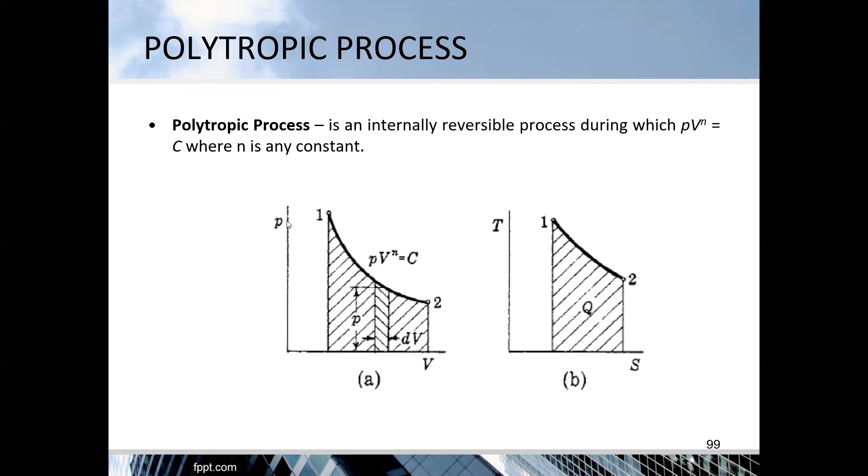So PV exponent n as constant. PV is equal to MRT. And T2 over T1 is equal to V1 over V2 exponent n minus 1, or T2 over T1 is equal to P2 over P1 exponent n minus 1 over n.

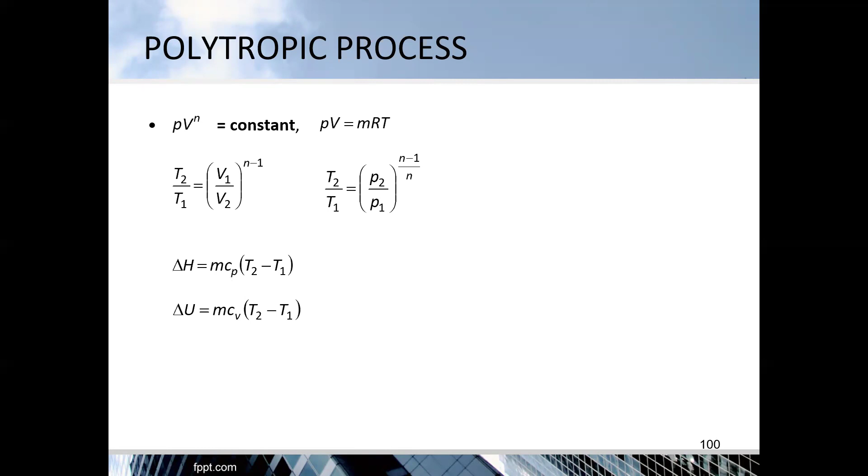Delta H is almost also the same. MCP times T2 minus T1. Delta U is equal to MCV T2 minus T1. All the equations, we will just put here.

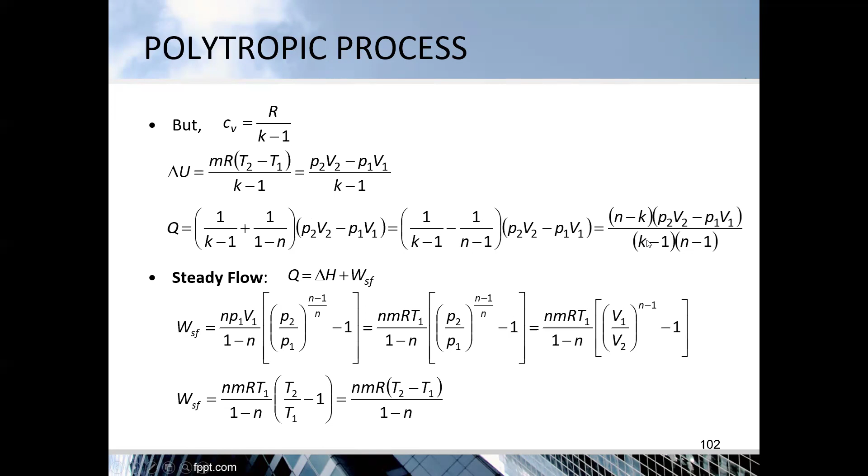For steady flow work, Q is equal to delta H plus WSF. WSF is equal to N times P1V1 over 1 minus N times P2 over P1 exponent N minus 1 over N minus 1.

Then equals NMRT1 times P2 over P1 exponent N minus 1 over N minus 1, which is equal to NMRT1 over 1 minus N times V1 over V2 exponent N minus 1 minus 1, or NMRT1 over 1 minus N times T2 over T1 minus 1, which is equal to NMR times T2 minus T1 over 1 minus N.

But CP is equal to KR over K minus 1. So delta H is equal to MCP times T2 minus T1, which is equal to K MR times T2 minus T1 over K minus 1, equals K times P2V2 minus P1V1 over K minus 1.

So adding, Q is equal to delta H plus steady flow work. This becomes 1 over K minus 1 plus 1 over 1 minus N times P2V2 minus P1V1, which is equal to K over K minus 1 minus N over N minus 1 times P2V2 minus P1V1.

So there's something here. Q is equal to N minus K times P2V2 minus P1V1 over K minus 1 then N minus 1. See? K here, K. Wait.

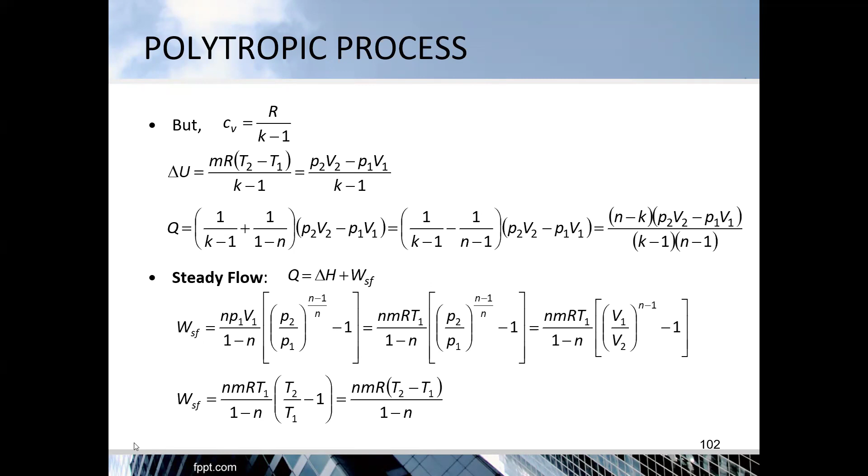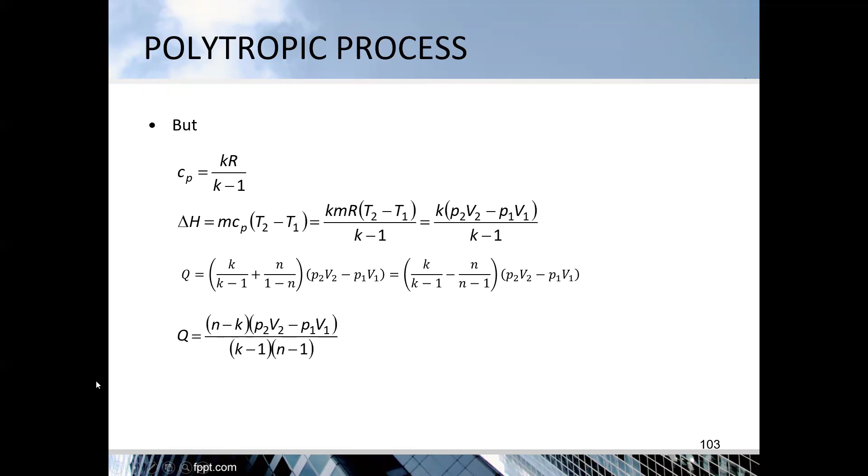So, Q is equal to K over K minus 1 plus N over 1 minus N. Yeah, it's the same. So here it's plus and minus. So this reverses.

Entropy, delta S is equal to mCV times N minus 1, N minus K over N minus 1 times ln of T2 over T1. Or delta S equal to mCV times N minus K times ln of V1 over V2.

Okay, so delta S equal to mCV times N minus K over N minus 1 of ln of P2 over P1 exponent N minus 1 over N. So mCV times N minus K over N ln of P2 over P1.

So please just check it. So CV times N minus K over N minus 1 is equal to Cn. So specific heat at polytropic. So just use that here for entropy.

Note, steady flow work is WSF plus delta K plus delta P is equal to negative integral of V dP.

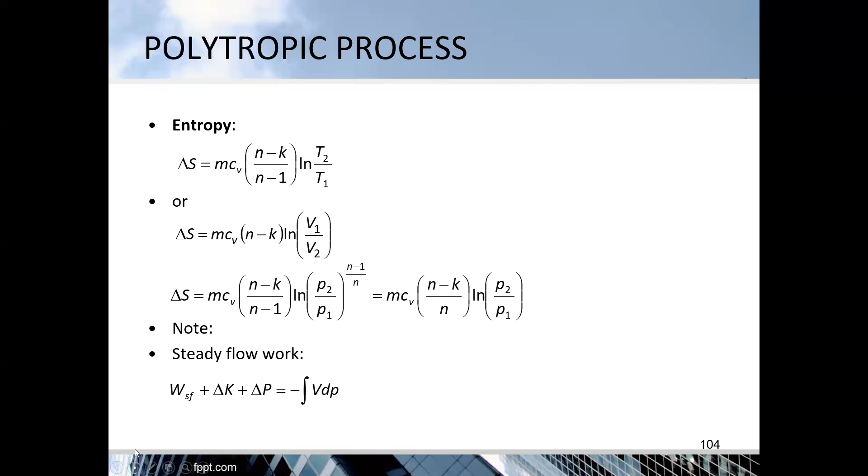Now, curves for different values of n. So here you can visualize it, because you need this. So the PV diagram, this is it. The vertical is isentropic, isochoric with n infinity, not 8.

Horizontal is pressure constant, n is equal to 0. So here is 1. And n is equal to 1.

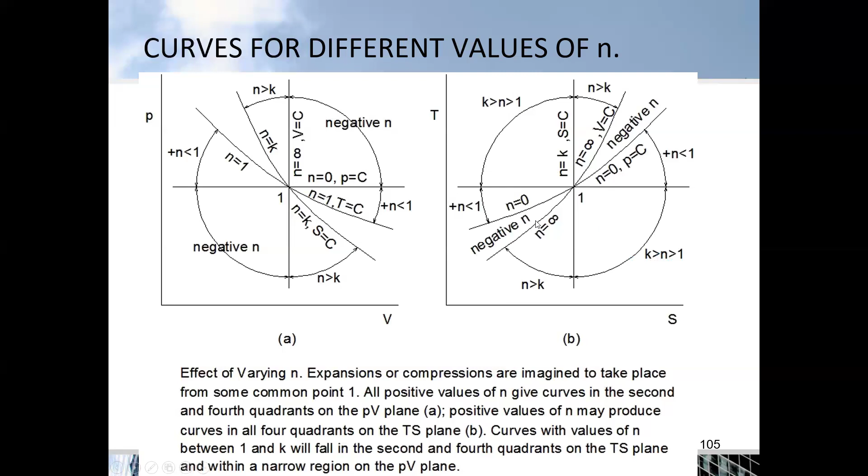Kasi yan. So example 36. After a series of state changes, the pressure and volume of 2.268 kg of nitrogen are each doubled. What is delta S? The given CV is 0.7442 kJ per kilogram Kelvin, CP is 1.0414 kJ per kilogram Kelvin. Solution: the formula is delta S equals mCV ln(T2/T1) plus MR ln(V2/V1). So yan ang general equation ng entropy.

And then substitute mo yung kasi ang given mo is pressure and volume. So delta S is equal to mCP ln(V2/V1) plus mCV ln(P2/P1). Derive yun na lang yan. Okay.

So delta S is equal to 2.268 times 1.0414 times ln(2V1/V1) plus 0.7442 ln(2P1/P1). It's double, di ba? So it's equal to 2.807 kilojoule per Kelvin.

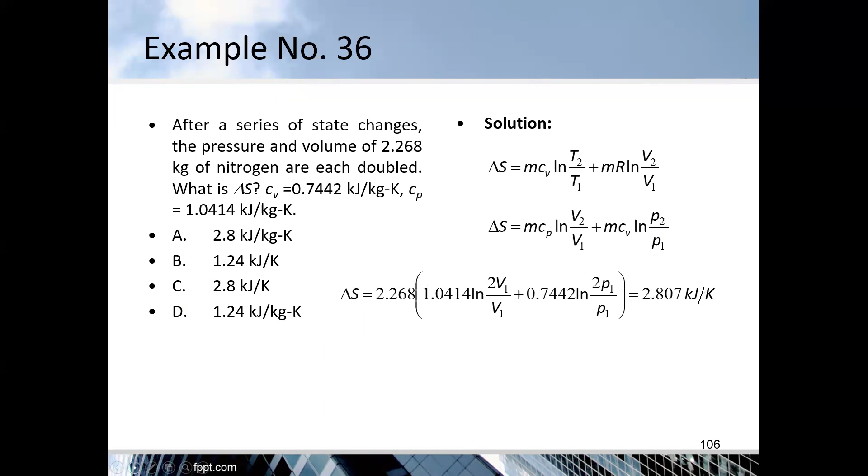Stagnation properties. Stagnation properties are those thermodynamic properties that a moving stream of compressible fluid would have if it were brought to rest isentropically. So no outside work, the kinetic energy brings about the compression.

The stagnation enthalpy H0 is equal to H plus V squared over 2GcJ. The stagnation temperature T sub 0 is equal to T plus V squared over 2GcJCp. And T sub 0 over T is equal to P sub 0 over P exponent (K minus 1 over K), is equal to 1 plus V squared over 2GcJCpT. Okay? So H0 mo dito galing, T sub 0 is equal to sa galing, then P sub 0 dito galing siya.

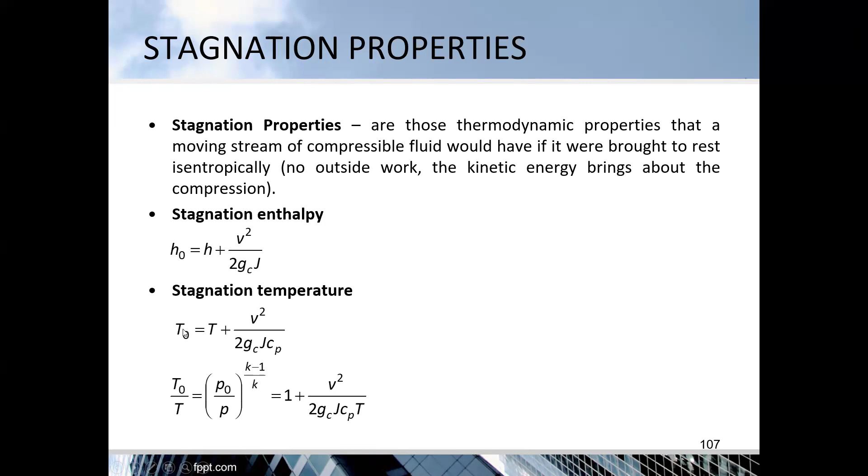Solve for T sub 0 muna. So makuha mo yung stagnation properties.

Mach number. Mach number is the ratio of the actual speed divided by the local speed of sound A in the fluid. So M is equal to V over A. For M less than 1, tawag doon is subsonic. M greater than 1 is supersonic. Sonic is 1. So acoustic speed A is equal to GcKRT exponent 1 half, yung speed of sound.

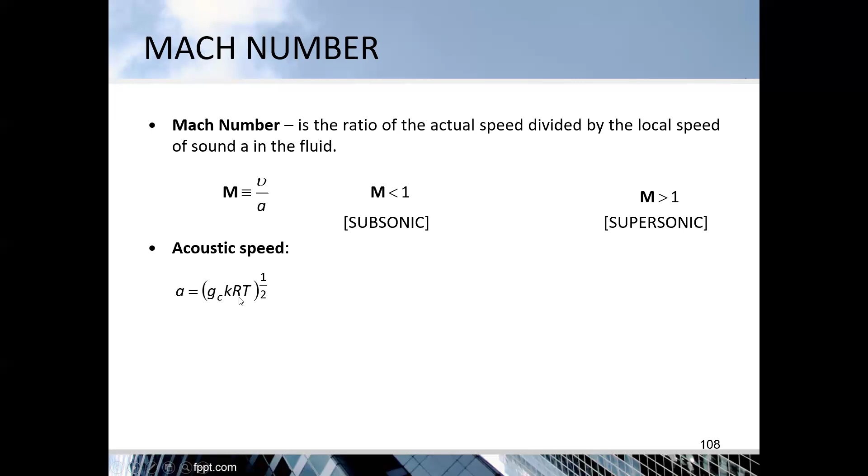Mollier diagram. This is the chart on which enthalpy is the ordinate and entropy is the abscissa. Straight line na straight line. Huwag yung i-drawing ulit yung form.

So dito kayo magpa-plot, entropy and enthalpy. Ito pala enthalpy. Tama, ito yung enthalpy niya. Dito siya, yung ano, vertical na yan: 2,000, 2,500, 3,000, 3,500, 4,000.

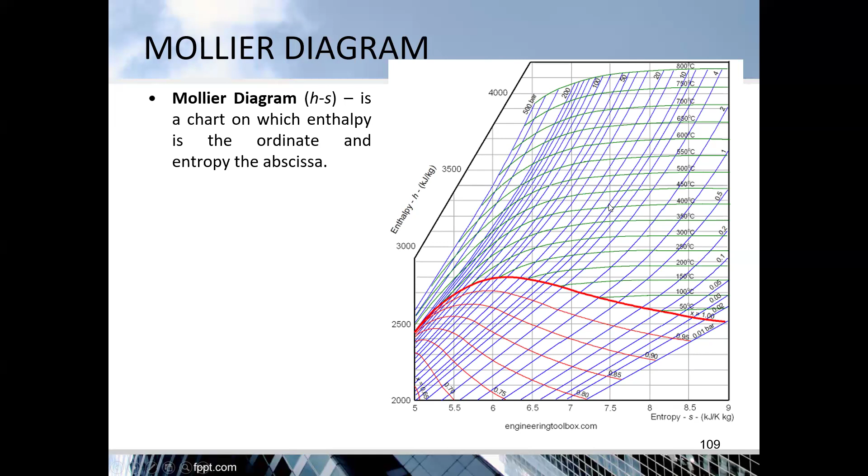So ang bawat 400 C, itong green, and pressure na 10, at least 10 bar, ito, dito. So makuha mo yung entropy, kung pababa, punta doon, so makuha mo yung properties, enthalpy and entropy.

Kailangan yun. So temperature entropy diagram, common din to sa steam, diba yung mga Rankine cycles. So yan, is this a constant temperature and pressure? Tapos dito na, pressure na lang ang constant mo. So superheated na siya, dito naman, part na to is liquid region.

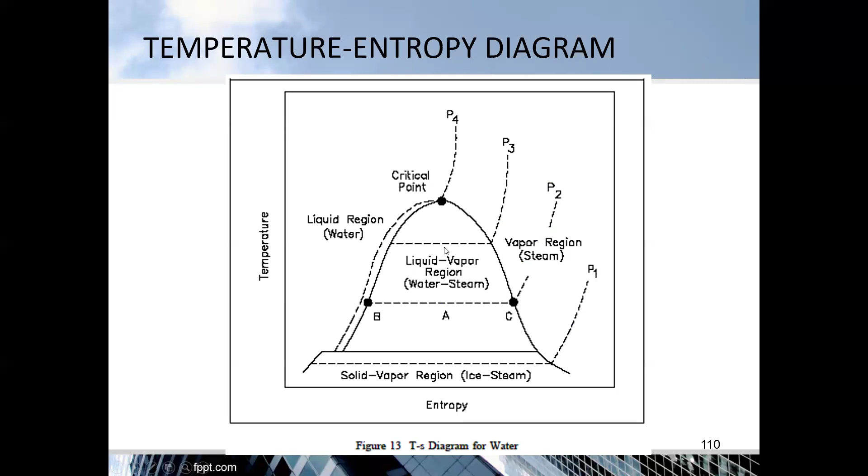Pag sinabing subcooled, that is the temperature ang na-extend. Pag sinabing compressed, pababa siya, tumataas yung pressure, pababa. Ang tawag talaga, yung from compressed liquid, yan. Dalawa yun, subcooled and compressed.

PH chart sa mga refrigerant, enthalpy and pressure, yung saturation curve. So andyan, makikita mo na ibang properties dyan.

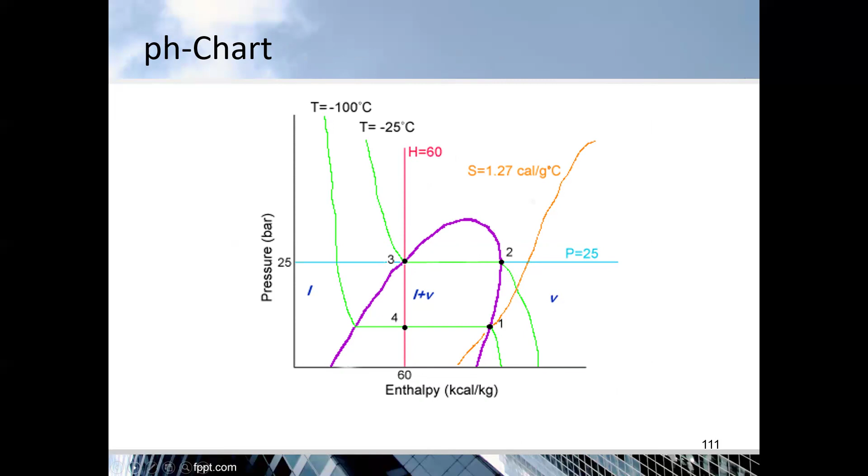Mixture. So mixture tayo, pure substance. Mixture, a substance made up of liquid and vapor portion, or two-phase liquid vapor system. X is the quality or dryness factor or vapor content. Y is the 1 minus X, is the moisture content or the wetness factor.

Properties of mixture: V is equal to V sub F plus X times V sub Fg. U is equal to U sub F plus X times U sub Fg. S is equal to S sub F plus X times S sub Fg. So ito yung mga properties na pwede mo gawa ng ganyan, kasi lahat siya unit mass.

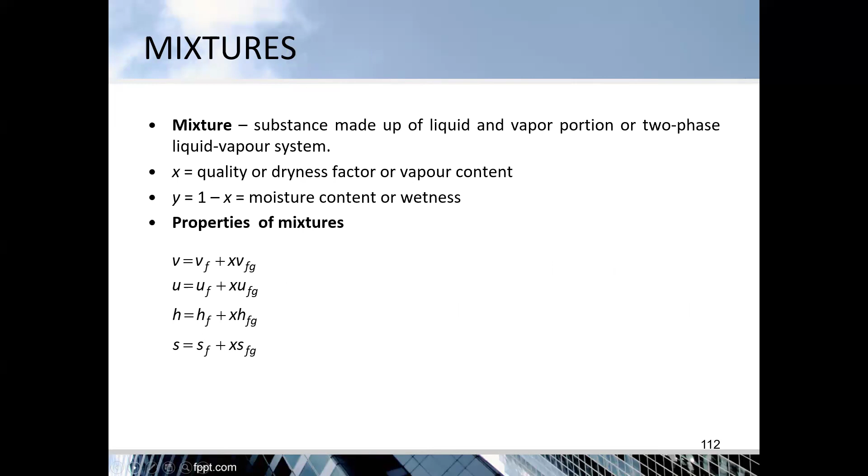So, this is about properties at saturated liquid. This is the difference between saturated vapor and saturated liquid. So, example number 37.

After expanding 2.5 liters of superheated steam at 2.5 megapascal absolute and 400 C, its pressure was decreased to 0.01 megapascal absolute. If its dryness fraction is 90%, what is the final volume of the steam in liters?

This is from the board exam, it appears sometimes. At 2.5 megapascal absolute and 400 C, V is equal to 125.2 times 10 exponent negative 3 cubic meter per kilogram. At 0.01 megapascal absolute, V sub F is equal to 1.0102 cubic meter times 10 exponent negative 3 cubic meter per kilogram, and V sub G is equal to 14,674 times 10 exponent negative 3 cubic meter per kilogram.

Solution: V sub 2 is equal to V sub F plus X times V sub G minus V sub F. Let's get the specific volume of the steam. After expanding, you don't consider the expanding in the superheating anymore. You go straight to 0.01 megapascal pressure and the quality or dryness fraction of 90%.

So V sub 2 is equal to 1.01022 times 10 negative 3 plus 0.9 times 14,674 times 10 negative 3 minus 1.01022 times 10 negative 3. Let's add this up.

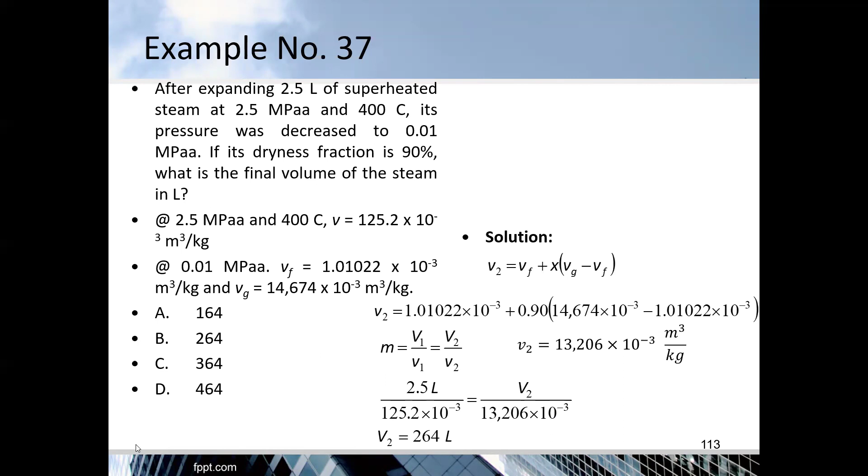Example number 38. Determine the heat transferred to the cooling fluid in a condenser operating under steady flow conditions with steam entering with an enthalpy of 2,300 kJ per kilogram and a velocity of 350 meters per second.

So kinetic energy is not zero. The condensate leaves with an enthalpy of 160 kJ per kilogram and velocity of 70 meters per second. Using change in energy in and out, consider Q as the input first. So Q is equal to H2 minus H1 plus V sub 2 squared minus V sub 1 squared over 2, divided by 1,000.

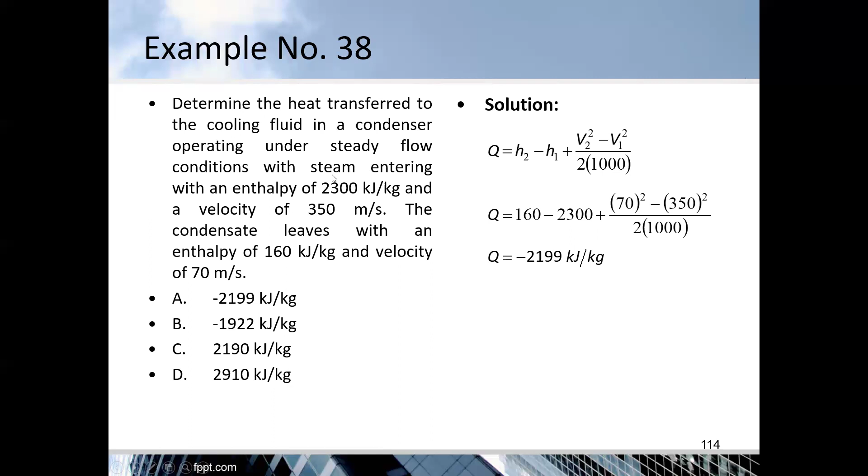1,000 is the conversion factor because what you get there is Newton meter, kilogram, or joule. So divide by 1,000 to get kilojoule. Substitute values: 160 minus 2,300 plus 70 squared minus 350 squared divided by 2 divided by 1,000 is negative 2,199 kilojoule per kilogram. We're using per kilogram because we have no given mass, and the answer is also per kilogram.

So the Carnot cycle. Carnot cycle: T1 minus T2, is equal to T4 minus T3.

Work is equal to QA minus QR, is equal to T1 times S1 minus S4 minus T2 times S1 minus S4. So efficiency E is equal to work over QA, is equal to QA minus QR over QA. Substitute: T1 times S1 minus S4 minus T2 times S1 minus S4 over T1 times S1 minus S4 QA. So E is equal to T1 minus T2 over T1, is equal to TH minus TL over TH.

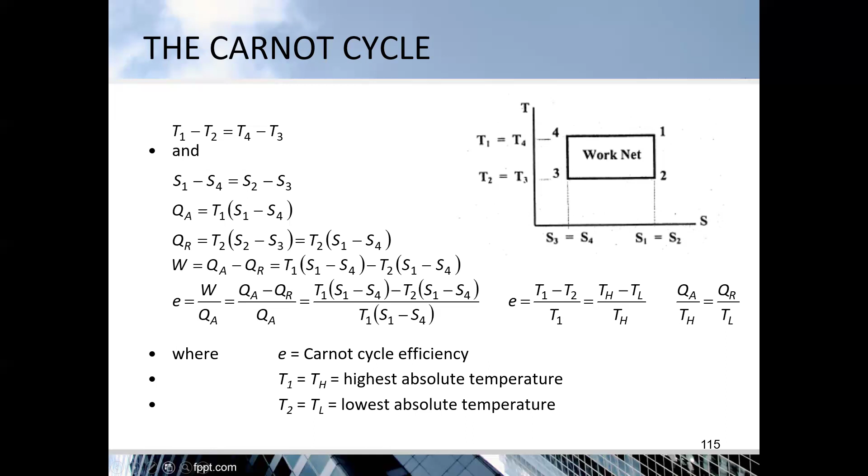Next is example 39. A Carnot engine receives 130 BTU of heat from a hot reservoir at 700 Fahrenheit and rejects 49 BTU of heat. Calculate the temperature of the cold reservoir.

So TH is equal to 700 plus 460, or 1160 Rankine. So efficiency is work over QA, is equal to QA minus QR over QA, is equal to TH minus TL over TH. What we need is temperature. So use temperature: 130 minus 49 divided by 130 is equal to 1160 minus TL over 1160. So TL is equal to 437.23... Rankine, minus 460 is negative 22.77 Fahrenheit.

So letter D. There's another method for this: QA over TH is equal to QR over TL.

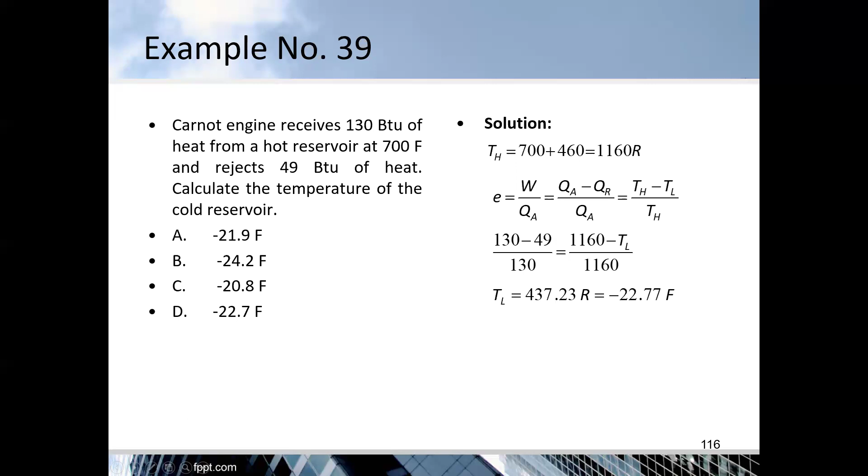Next is the Stirling and Ericsson cycle. Go back to your notes. The ideal Stirling cycle is composed of two isothermal and two isometric processes, with regeneration occurring at constant volume. The ideal Ericsson cycle consists of two isothermal and two isobaric processes, with regeneration occurring during constant pressure.

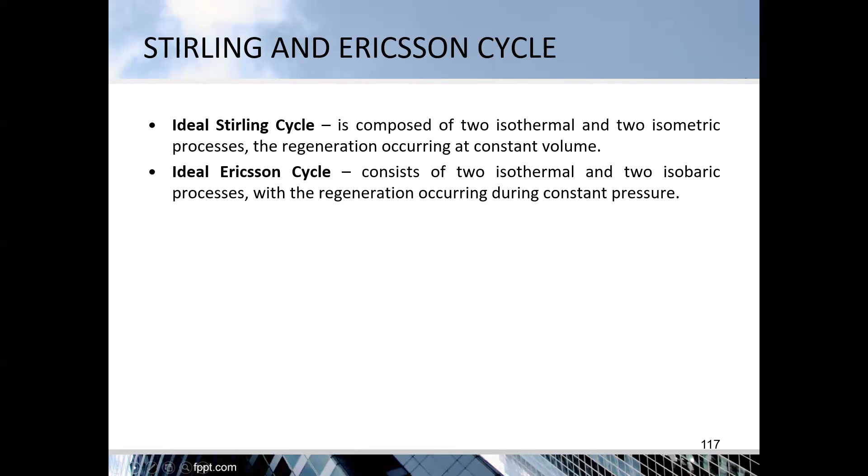So basic working cycle for various applications. For steam power plant, the common one is the Rankine cycle. Gasoline engine, spark ignition, is Otto cycle - that's not in thermo, that's for power plant. Diesel engine, combustion ignition, is diesel cycle. Gas turbine is the Brayton cycle. Refrigeration system, refrigeration cycle - there's reverse Carnot and vapor compression cycle. So there are many.

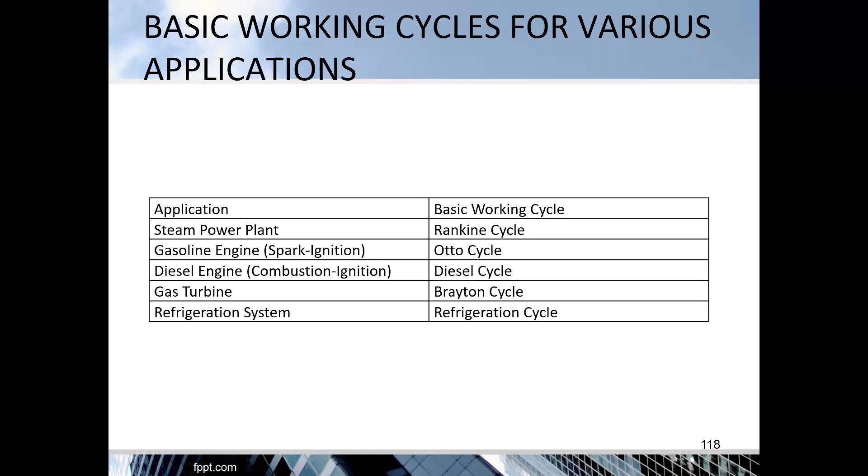Example number 40. This is a three-process cycle. 1 kilogram of air at a pressure and temperature of 1 bar and 15°C initially undergoes the following processes in a cycle. Let's start at point 1: 1 bar and 15°C. Isothermal compression to point 2 - check the curve, the curves are there.

2 to 3 is polytropic, and 3 to 1 is adiabatic. So that's the P-V diagram, the phase diagram. Double check this - the slope of PV exponent n is higher than the constant temperature line.

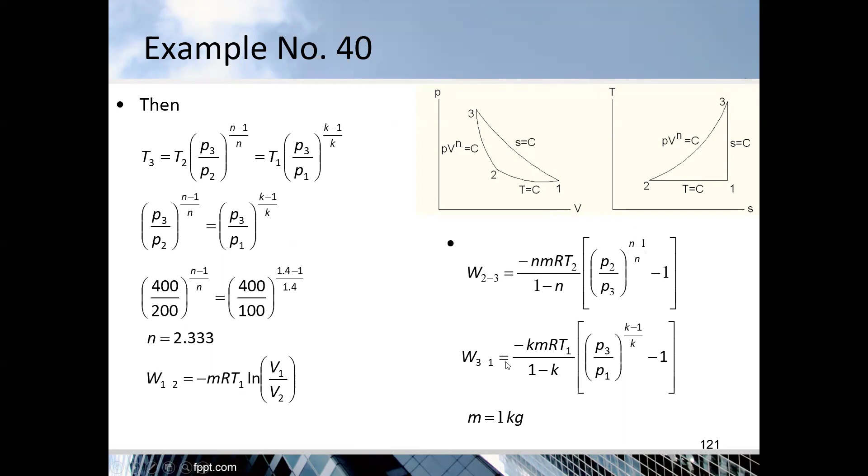From 1 to 2, this is isothermal, so negative M R T1 times ln of V1 over V2. Work for 2 to 3 is polytropic: negative N M R T2 over (1 minus N) times (P2 over P3 exponent (N minus 1 over N) minus 1). Work from 3 to 1 is negative adiabatic work: negative K M R T1 over (1 minus K) times (P3 over P1 exponent (K minus 1 over K) minus 1), where M is 1 kilogram.

Let's substitute the values. These are the formulas. So 1 to 2 is negative 1 times 0.287 - that's R for air - times 288 in SI units, 0.287 kilojoule per kilogram Kelvin, times ln of 200 over 100, based on the pressures. So this equals negative 57.3 kilojoule.

For 3 to 1, here's the equation, substitute values: negative 1.4 times 1 times 0.287 times 288, over (1 minus 1.4), times (400 over 100 exponent (1.4 minus 1 over 1.4)) minus 1 - all based on pressure. So work 3 to 1 is 140.6 kilojoule.

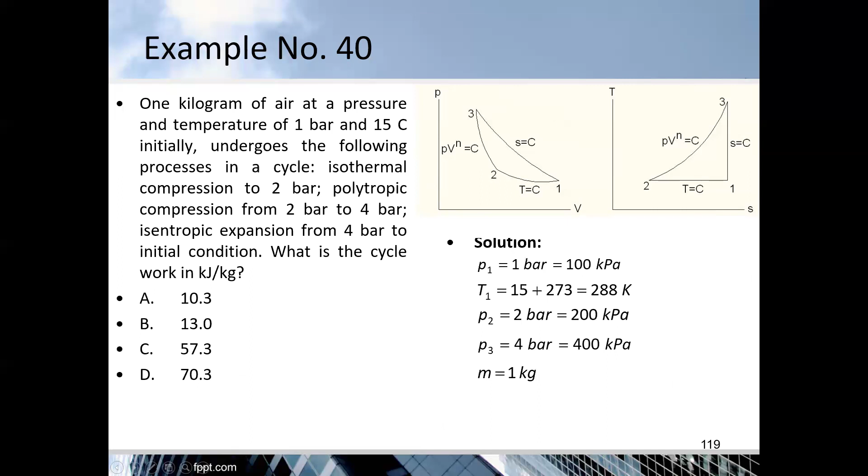Total cycle work is work from 1 to 2 plus 2 to 3 plus 3 to 1: negative 57.3 minus 70.3 plus 140.6. 1 to 2 is negative, 2 to 3 is negative, then 3 to 1 is positive. So the answer is 13 kilojoule, letter B.

Yes, so this is the thermodynamic review topic.